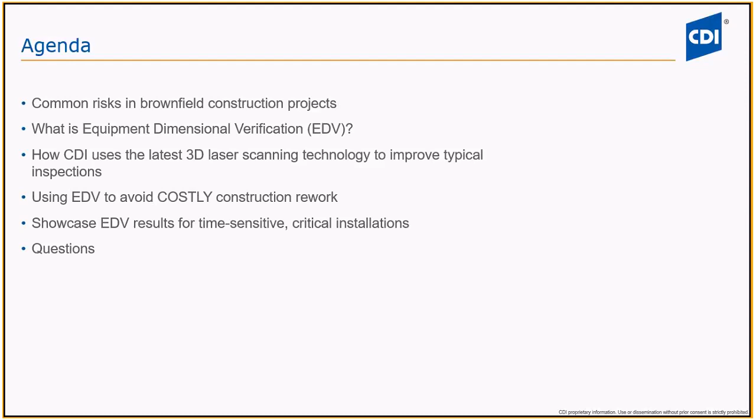From there, I'll discuss how our EDV helps avoid costly construction rework. And we'll walk through some of the benefits of using EDV for your time-sensitive and critical installations. From there, we'll turn it over to any questions that we may have from our audience.

So first, let's talk through some of the common risks with brownfield construction projects. Like I mentioned, the focus of this presentation is on misalignment issues. What are some of the misalignment issues that we have seen? We've seen some between your piece of equipment and your piping. We've also seen misalignment between your equipment and your foundations. And we've also seen it between two piping systems. So with those issues, what we've seen is longer construction time, higher construction labor costs, and schedule delays.

So in the next slide, I'll talk about some common issues on piping in a little bit more detail. And then I'll talk about some examples of pieces of equipment that we've seen in some of our past projects. From there, I'll discuss the EDV service and how it helps mitigate these problems.

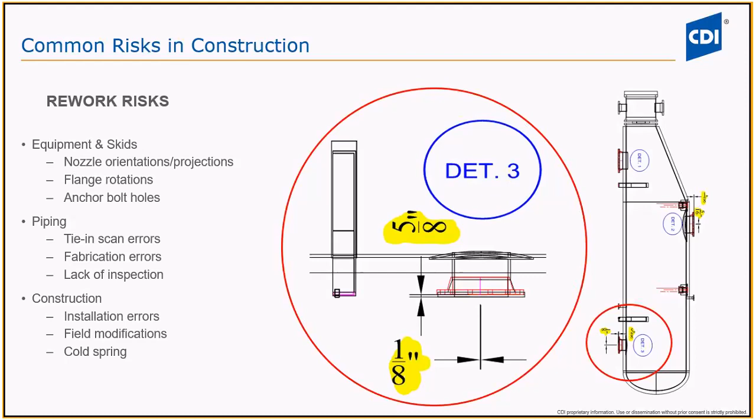Okay, so let's talk through some of the misalignment issues that we've seen in piping systems. The first example is a rotated flange. So if you can envision yourself trying to connect two pipe spools together, and you come to find out that the flange bolt holes are slightly rotated enough to impede you from putting your stud bolts through. So to fix that error, you would need to cut that flange, prep the weld area, realign the flange, and make the weld again. So due to that error, you had more labor time, you've had the cost of the weld, and you've had the schedule delay.

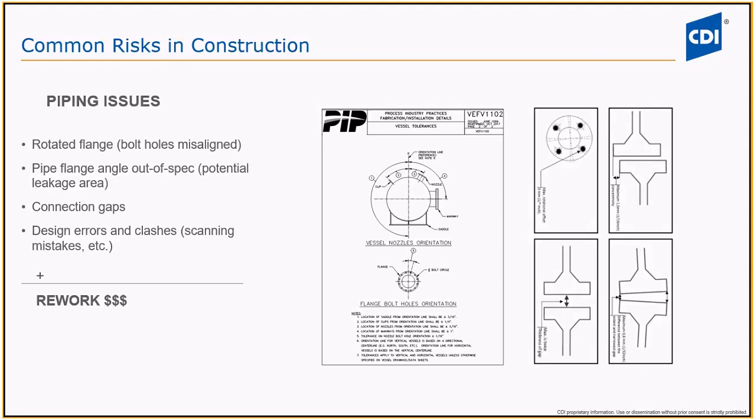Next, let's talk about some of the misalignment issues with pieces of equipment. We've all been in a project where we have a replacing in kind scenario. You have an existing old piece of equipment that needs to be demoed out and be replaced with a new piece of equipment in its place, with the intent of reusing the foundation and reusing the existing piping. In theory, it sounds like a simple exercise, but in practice, it's often more difficult than it seems.

And why is that? First, the documentation of that old piece of equipment may not be available. And if it is available, the information within that document may not be reliable. Also, the as-built information may have not been recorded in the system. Also, modifications to that piece of equipment may not have been documented.

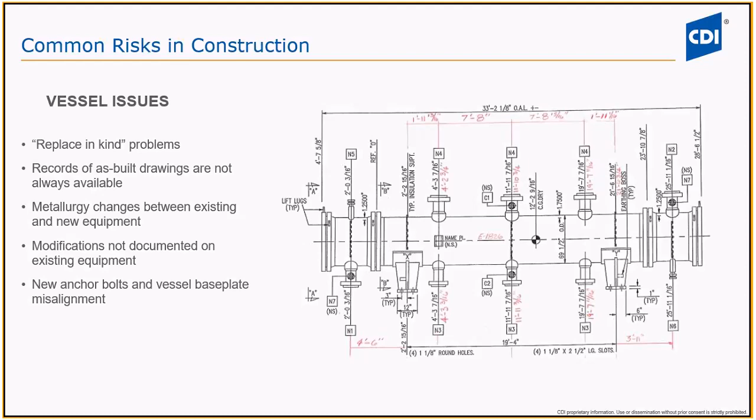With those examples, I'll introduce our equipment dimensional verification service. This is CDI's inspection service of 3D laser scanning equipment, piping, and structures, reviewing the output data against the baseline design and construction and fabrication tolerances. Through our projects and research, we found that construction rework and vendor errors account for almost 1% of your total construction cost. So for multi-million-dollar projects, these errors amount to hundreds of thousands of dollars of rework, even millions. So CDI saw the need to provide a service to help mitigate those problems.

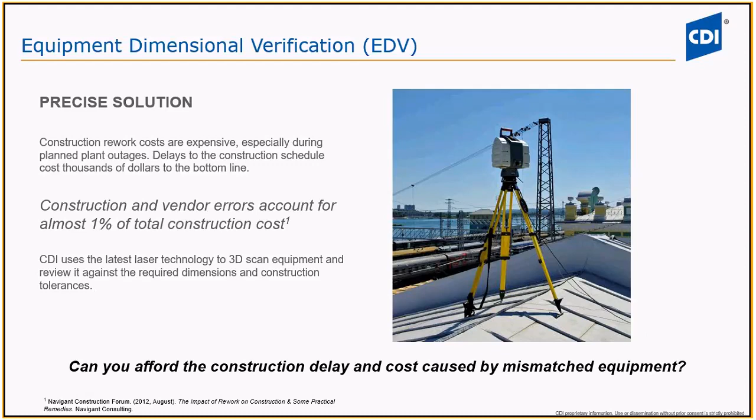So how do we do it? CDI will use the latest laser scanning technology to scan your piece of equipment, your piping or your structure on site, at the shop or wherever. We'll take that data, get it registered in our software, and then get that modeled, reviewed, and checked against the baseline design, which could be your equipment drawings, your fabrication tolerances, your construction tolerances, or your tie-in dimensional requirements.

For a small project, we like to say that our timeline is 1 week to perform this service, from deploying our team to the site, taking that scan, registering the data, reviewing that in our software, then reviewing it against the baseline design and outputting that into a report that gets sent out to our clients and their fabricators.

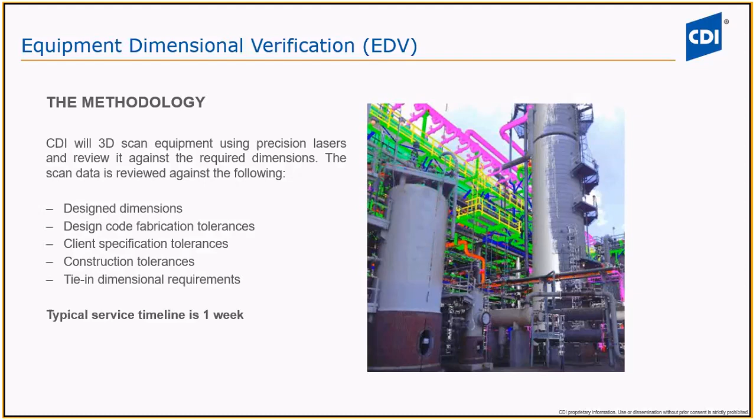So what will you receive if you select our EDV service? Once we do the data gathering, we'll take that data and start the thorough and extensive review process. We'll evaluate the critical areas of that piece of equipment or your piping. We'll develop a line item by line item checklist where each component will be reviewed against the baseline. Examples are the flange projections. We'll check those dimensions. We'll check the overall length and the width of that piece of equipment.

We'll check the flange face rotations. Are those on par? We'll also check your anchor bolt holes. Do those match the anchor bolts on site? Will we have any clashes or not?

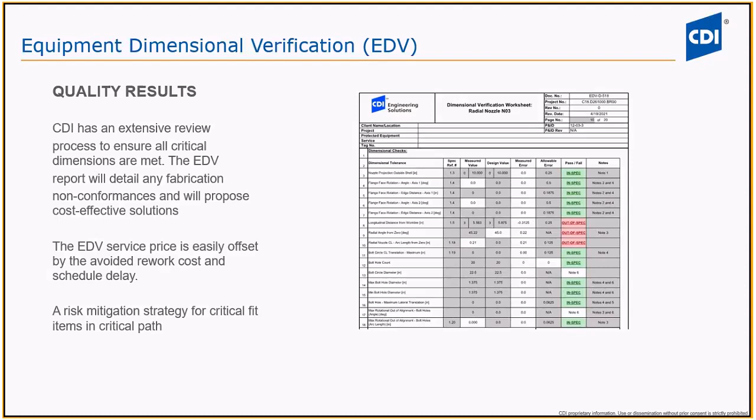So by using our service, we have some great benefits. Some of them being having less engineering time answering construction RFIs. So any misalignment errors that you can avoid downstream means that you'll have to spend less money having your engineering firm answering some of those errors. You'll also spend less money finding the root cause. Another benefit is preventing unnecessary field labor costs and overages. So any misalignment error that gets avoided is time savings in your labor and any schedule delays.

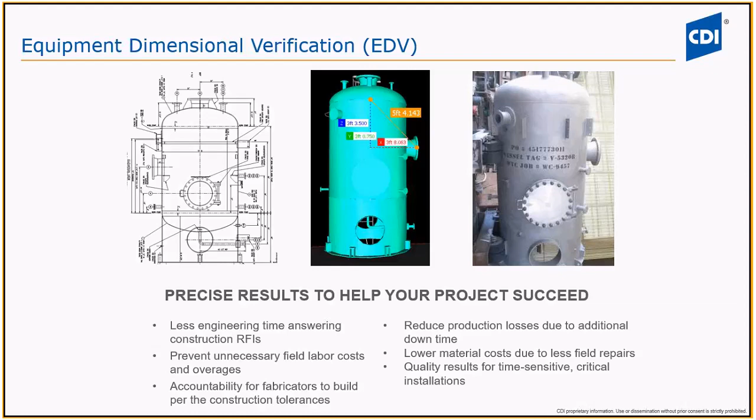So in conclusion, we've defined what an equipment dimensional verification service is. It's our precise dimensional inspection service developed to mitigate construction installation misalignment. We've also talked about how CDI incorporates the latest laser technology like Faro and the Z+F to scan those pieces of equipment, piping, structure, review it, and check it against the baseline design. And also we've talked through why it's important to mitigate those misalignments. We want to reduce this high cost and schedule delays for your project.